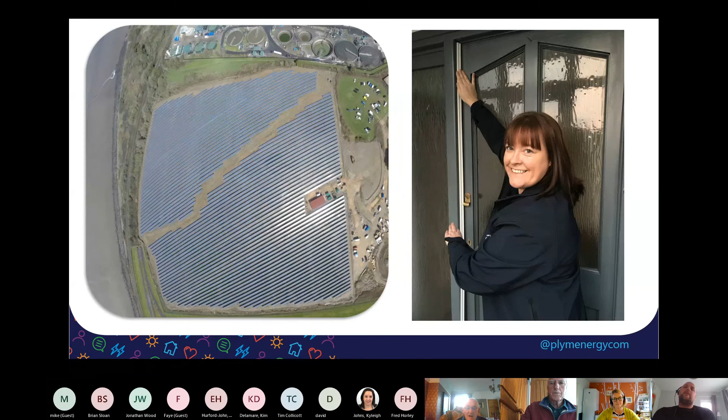Slightly more practically, in terms of what we've done, there's two really developed sides to the work we do, and one of those is about renewable energy in the city. So we own renewable solar installations on many community buildings around the city, and also this array in Ernesettle. And this array is on a piece of land that really can't be used for much because of the condition and where it is next to a MOD munitions yard and a sewage treatment plant. There's not a lot you can do with that land, and so we've got a 5 megawatt solar array, and all of our solar resources have a number of benefits to the communities they're housed within.

So there are people in the city and further away who have all invested in those resources, and they're getting a rate of return for their investment. And so those are ordinary people really. In addition to that, we're displacing fossil fuels from the grid by putting these in place, but I think more importantly for me and where I come from, we've got the host organisations, so schools and community buildings, which are benefiting from cheaper electricity. And all of these resources are generating a community benefit fund, which is going back into doing really good work within those communities for people on lower incomes, people in fuel poverty, and that side of things. So we've raised about £2.5 million worth of community shares to fund these, so there's quite a lot of scale of that.

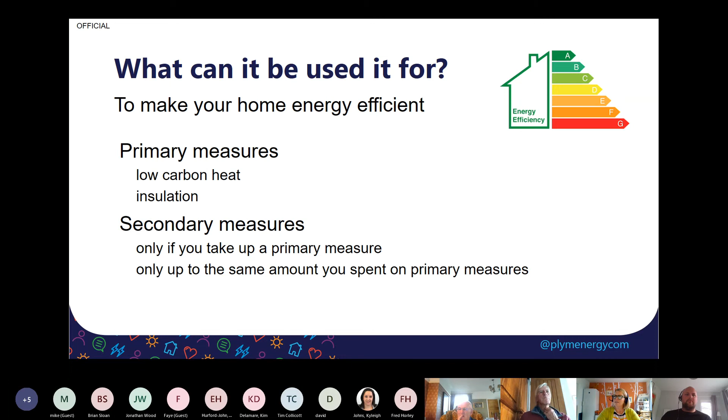For this scheme, there are primary measures, and your primary measure is a gateway. It's a gateway to the secondary measures that you can take up only if you've taken up the primary measures. So that might sound confusing, but we'll go through what those primary measures are, and you can judge for yourself whether there is something that fits your home and your circumstances. So let's have a look at the primary measures first, and we'll start with insulation.

Solid wall insulation, also known as external wall insulation, is generally for older properties built prior to 1930. You're likely to know if you live in a solid wall home. If you've got one of the many Victorian or Georgian terraces in Plymouth, that will be you.

Also, you can tell the difference between a solid wall and a cavity wall pretty much by the lay of the bricks, and that's of no help to you if you have some render on, I do realise, but a surveyor would be able to tell you that. However, if you can see your bricks, if it looks like how you used to build your Lego as a child, if it's even and it's the same size bricks and they're beautifully overlapped, it's probably cavity wall. If it's a little more mixed up and you have smaller bricks between the two, chances are you're looking at a solid wall. A lot of people have cavity wall insulation already, not many have solid wall insulation.

Other insulation measures in this primary set are underfloor, and that's whether you've got solid or a suspended floor. Loft insulation, many people have that, but this will include a top up if you had it years and years ago and you don't have so much. Generally, if you've got 150 mil or less on loft. Flat roof insulation, it's also including room in roof.

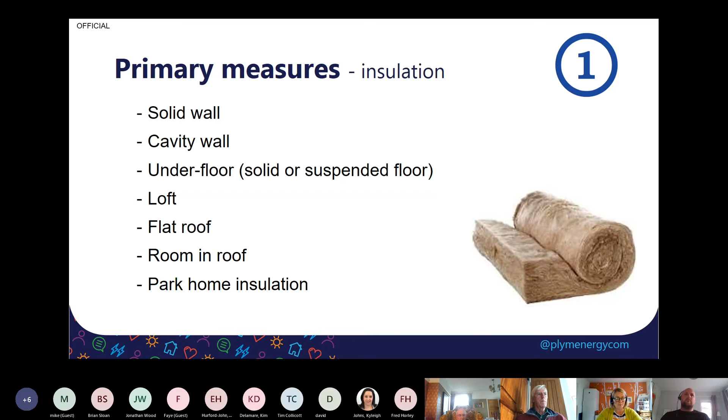So those are the primary measures. I can give you an idea of some of the costs, but I'll do that after I've been through the second slide. So that's the insulation measures covered. Second is low carbon heating. So there are 4 listed there. There's your air source heat pump, ground source heat pump, solar thermal. Importantly, that is not solar PV. So that's not your electricity generating panels that you see on a lot of roofs. This is purely for your hot water, solar thermal. And then this probably isn't that relevant for people within Plymouth, to be honest, generally these outlying areas, rural areas,

but biomass pellet boilers. Just to skim through some of the approximate costs on those, if you're thinking that perhaps solid wall insulation is for you, you would have spent your whole grant on that. It's around £10,000. Cavity wall insulation, you're looking at around £1,000. Underfloor is variable. Actually, it can be quite complex with solid floors. Loft should be around £500, room in roof 2,000 to 3,000, and a park home will be variable.

Air source, ground source, solar thermal, you do have the renewable heat incentive that will make up a case as to whether you think you want to install those measures or not. You'll also want to make sure they're correctly sized. If they're oversized, they aren't particularly efficient. You'll also want to make sure that your house isn't very leaky. They need good airtight houses to work. They work at a lower level of heat, and so it's quite important not much is escaping.

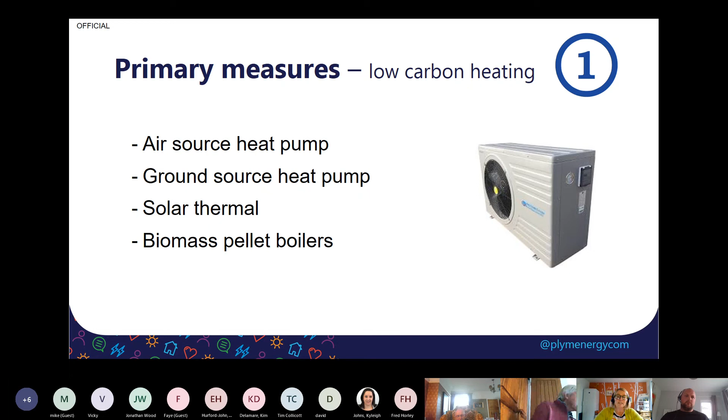So those are your primary measures. Those are your gateway measures. And once you've been through that, you can access the secondary measures. It's the secondary measures that caused quite a lot of interest when it came out because, well, we'll go on to them and I'll discuss the reasons why. I'll start with draught proofing. Secondary measures can include draught proofing. That's very important for comfort. Actually, a room can be as warm as you like, but if the wind is whistling past your ankles or around your neck, you can feel ever so chilly.

It's the double glazing that really attracted attention when this scheme came out, and there was confusion. People with 1970s, 1980s double glazing, which isn't particularly great and who desperately want to upgrade, unfortunately are excluded from this. You can only upgrade to double or triple glazing from single.

And that was a disappointment for people, but unfortunately it is a limitation of the scheme. However, secondary glazing, that's a good thing to be able to have if you do still have some single glazing, especially if you're in a heritage zone or places you can't do a lot of work to the outside, you're under some restrictions. Secondary glazing can be a way to make sure you're staying warmer.

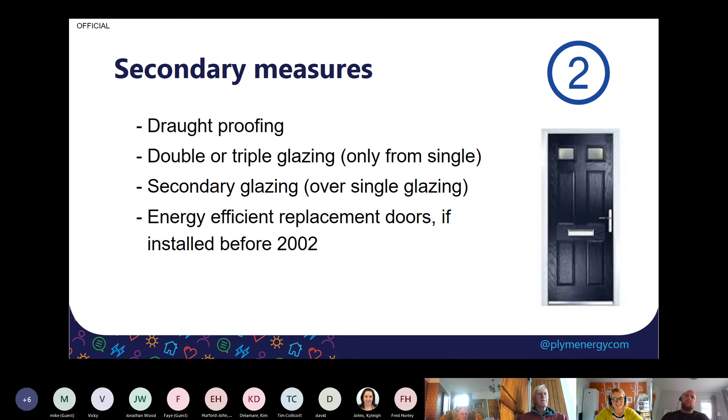And also the doors. The doors is an interesting one. Energy efficient replacement doors, front and back, but only if you had them installed before 2002. So again, it might work for you, but there are some caveats. And moving on, our secondary heating measures also include heating controls. And those are well worth looking at.

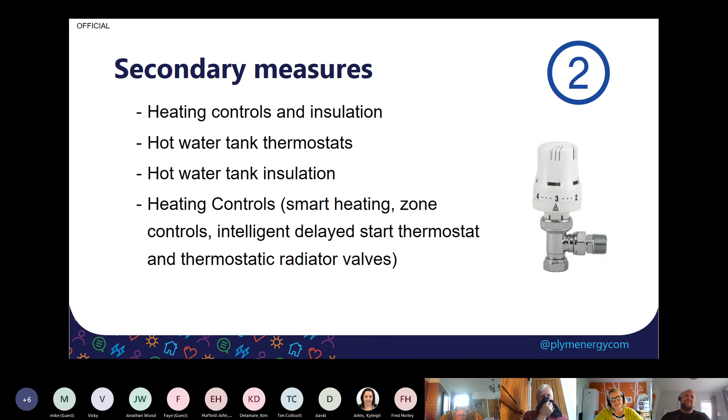The work that we do with the energy team often includes putting in TRVs, thermostatic radiator valves, and heating controls, and they do make a big difference. Things such as the hot water tank insulation, I'm not sure whether you might not be a bit better off walking into a DIY store and picking one of those up, in all honesty, or maybe even giving us a ring. Yeah, but they're all things that can come under these secondary measures. And on to the next one.

So some common misunderstandings. I did say there were some misconceptions about the scheme. You cannot, unfortunately, as I've mentioned, upgrade your old double glazing. I have yet to find a scheme that allows that, and when I do, it will be a happy day. You cannot use this scheme to install a new gas boiler. You can't install solar PV panels, solar thermal only, as we mentioned earlier. That's out of scope. You can't insulate a room if it hasn't got fixed central heating.

So for example, if you've had a new extension, or if you just started to put a room in your roof, you're probably not quite there yet, unfortunately. You most certainly can't pay for works that have already been done, which is a great shame. And you can't pick any contractor. They have to be accredited. They have to be signed up to deliver the scheme. More and more are signing up.

You'll have noticed, I'm sure, the chat in the press and the buzz around it, and a lot of that is around the lack of contractors and the lack of capacity in the market to be able to take up the demand that there will be from this. There's a lot of interest in this scheme, and there aren't a huge amount of contractors. We're told it's increasing every day, but it will present some challenges, and so sadly you can't pick any contractor.

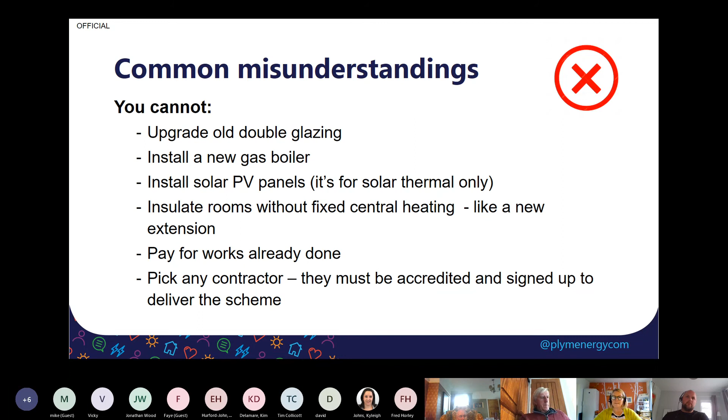There are some things on the plus side, put a nice green happy tick there. There are some things that you can cover that you might not anticipate. So this is quite good news, a good news slide. You can do your design drawings and calculations. So that's brilliant. You want to make sure you're well prepared before you start retrofitting. Damp specialist, structural engineer costs, again, fabulous stuff to make sure that your house is in the right state before you start making any sort of dramatic changes.

Moisture risk, you do want to evaluate your moisture risk. Making changes to your home, if done badly or if not thought through, can cause damp. Estimated payback. Cost is important to a lot of people, payback time. To others it's not, and it's more about taking care of the home, or it might be an ethical decision that you're making. It will also pay for air tightness tests, which is great, especially if you're considering some of the renewable heat measures that you can put in through the scheme.

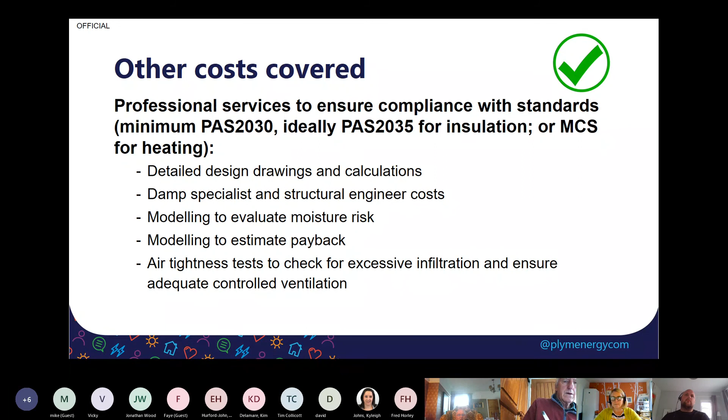Contractor costs, this is all good to see. Labour and materials, scaffolding, waste removal. And this is a nice one, we like this. Reasonable enabling work to support the retrofit. Now, necessary is an important word. Necessary structural improvements. For example, if you have a roof that you know needs replacing, you won't be able to say it's a necessary structural improvement, unfortunately. That's part of maintaining the fabric of your house, and they won't be covering things like that.

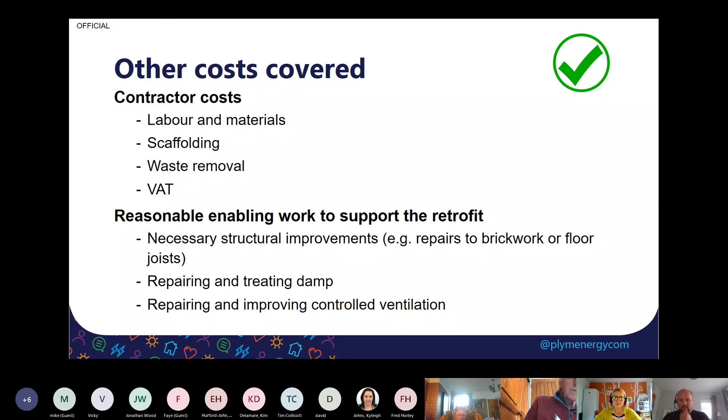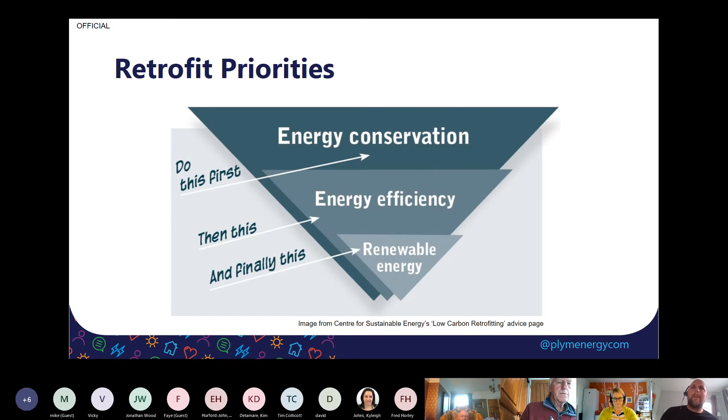So I'm now going to run through a few of the risks to retrofitting, and this is a bit, I've prepped you for this, where I get a little bit alarming, but bear with me. It's so that we've got a clear view of this, really. So I've got two diagrams there that look at modern buildings and older buildings. It's really important to understand the difference between those two types of building, and what you've got and how that might affect you. And then it shows it quite well.

And essentially, to start with a modern building, what you're looking at there is a sealed box. You're looking at walls that are absolutely sealed, shouldn't let water through at all. You're looking at the roof, it's the same thing, and you might have, for example, at the floor, this plastic damp-proof membrane that runs across the whole floor that stops any moisture coming up from below, and you'll have damp-proofing running through where windows meet, and you might have in your loft not just tiles, but underneath that a layer of membrane or felt that's completely blocking off any damp coming through. So it's a really well sealed unit, and should be pretty well sealed in terms of air leakage as well. And so then you build in things like extractor fans that allow that air to go out.

And the way I look at this, and I'll keep returning to this analogy, the way I look at the difference between a modern and an older building is a bit like if you're going out for a day on the hills, going for a walk on Dartmoor. A modern building is like a waterproof jacket, really. It's a membrane. It completely blocks off any rain from getting through.

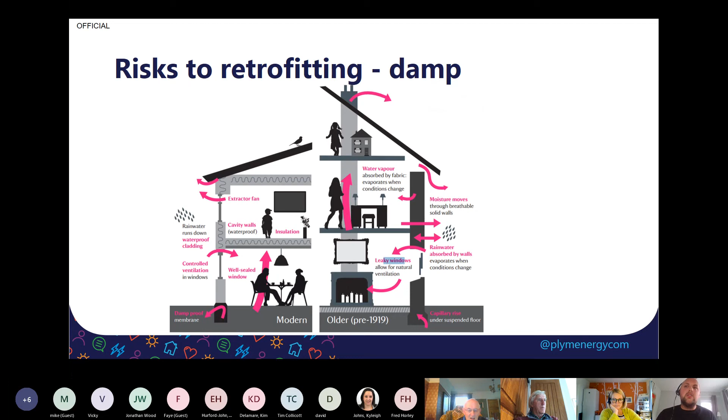So a further risk that can happen in retrofitting, and this is an example of external wall insulation, solid wall insulation, and you can see here they've applied it to the outside of the house, but there's two big gaps on there where there's flues. I think there's a flue from a boiler and another vent, I'm not quite sure what that is, where they just haven't really known what to do. You should just extend the flue or the vent and then apply insulation around it. They clearly haven't done that.

And similarly around the doors, there's this slightly more interesting plaster work, and again they clearly haven't known what to do there, or just haven't had the time or the budget to cover that.

And again, I'm going to stick with comparing this to somebody wearing clothes, because it's a bit like if you went out on a really cold day and you wore a really, really short down puffer jacket, and it got down to about your belly button, but you left a whole load of your belly free, or you wore shorts or something like that. Part of you might be really well insulated, but part of you isn't. You're going to be cold.

Also, if only half of you is underneath the duvet, you end up in a situation where half of you is really warm and half of you is really cold. It's not a situation you want to be in if it's really cold outside. And it's the same for your house. If you do leave big gaps like this in the insulation, you're going to get a lot of heat leaving through there.

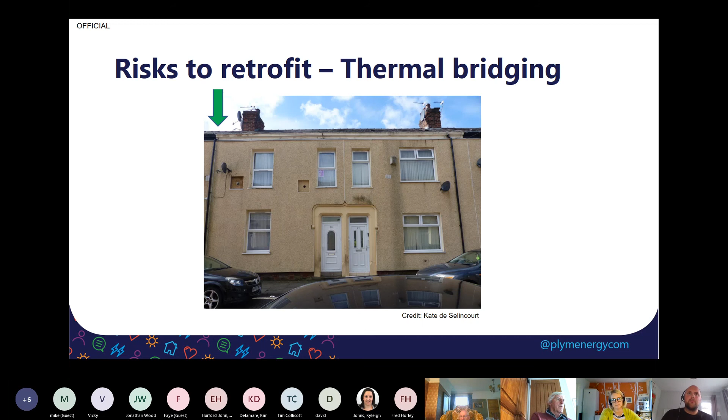The last one is air leakage. I mentioned earlier about comfort, and Claire mentioned earlier that another thing that has a big impact on comfort is drafts. So drafts are one part of the air leakage equation, if you like. But just to be clear, there's a difference between ventilation and air leakage. I have heard people say you need a bit of air leaking in a building, otherwise it can get damp and it can get, you know, not fresh air.

You do need ventilation, and part of your ventilation strategy might just be trickle vents in the window or something like that. You do need ventilation, that's definitely true, and that can be provided by windows, it could be provided by extractor fans. There are various forms of doing that, some much more high level ones, heat recovery fans that suck out the warm air from your house that's damp and stale and replace that with dry fresh air, but they use the air they're sucking out to warm the incoming air. So if you want to go really advanced, there's really great ventilation systems for that.

But I don't agree with the statement that you need lots of drafts in your house to keep it dry. Quite often it does exactly the opposite. So the aim is to reduce that unplanned and uncontrolled loss of warm air from a building, and to keep that controlled air, so that you're going to get the same amount of ventilation, whether it's blowing a gale outside or whether it's relatively still outside.

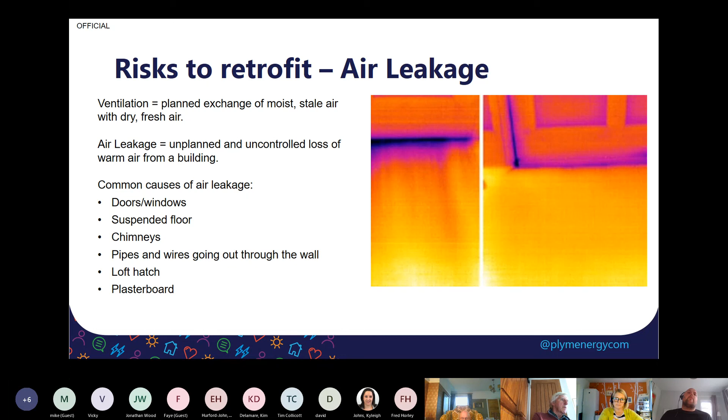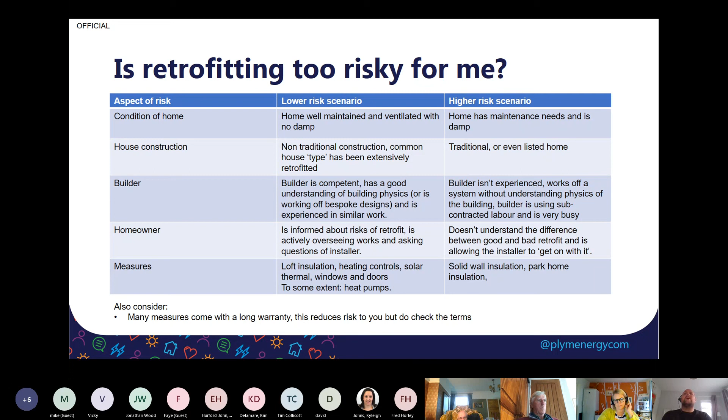So that comes to this question, really: is the Green Homes Grant right for you and your home? And it is going to be right for an awful lot of people. That all makes it sound like it's a really high risk thing to do, but it's just that those things need some considering. If you're showing up as high risk on some of those, you need to think about what work you're doing to the house. Is that going to cause any problems? Installers having very little capacity is going to be a problem if you're trying to do something quite bespoke, if you've got quite a complex house and you might need to ask installers to do something quite different to what they normally would do.

Understandably, those installers that are trying to get an awful lot of work done very quickly might find some resistance to that, and it might not be resistance. It might just be that they're really trying to do that for you, but they're really struggling with their capacity to do it. Actually, if what you're doing is relatively off the shelf, things like your cavity wall insulation, your loft insulation, your floor insulation, all of those are reasonably well practiced, or solid wall insulation, if your house is relatively simple, you may not struggle so much.

You may have to work a little bit harder to keep on top of installers and make sure you're getting the appointments, because they will be busy, but it's not necessarily a risk to whether your project will go ahead successfully.

But if you are trying to schedule it with other works, if you're doing a whole extension and lots of other work in your home, and you've got a builder that's doing a lot of that work, and you're trying to bring in an installer who can work under this scheme to do bits of that work, I think you'll find that a struggle, to be honest. And the prices may inflate due to demand.

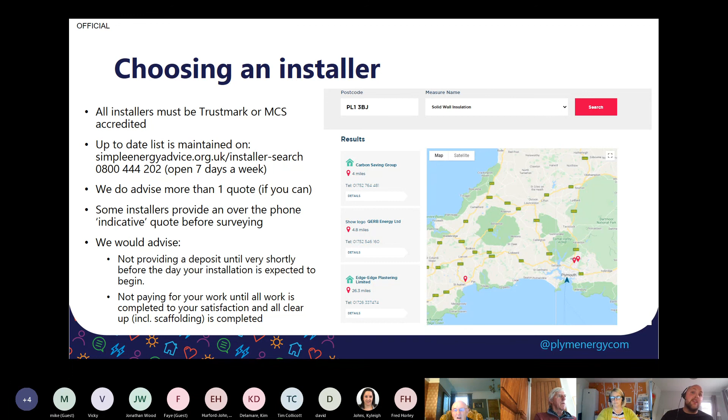And actually, they should be good to have a good chat with as they go around your house. You want to be there and having a good talk to them about it, because people doing that qualification should be relatively informed about the process of installing, what that would look like for you, how disruptive it might be.

And if you are looking to do much more extensive work, if you've got a much bigger budget and your building is quite complicated, there is a more in-depth report. You could do a full SAP report that looks at things in a bit more detail. And that would give you a better assessment of things like what the likely energy savings would be.